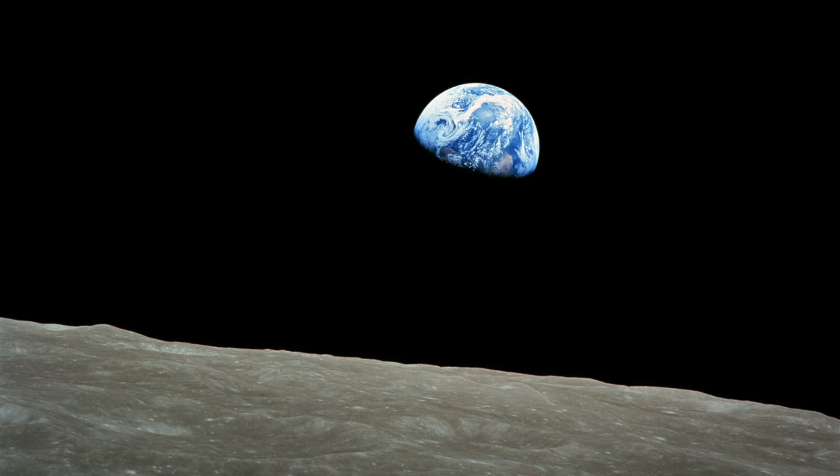You know, architects, we're not engineers, we're not scientists. We have a specific skill set, which is almost like that of integrators. We bring together a lot of different languages, a lot of different mindsets, and we try to bring a vision to something. This image that you see here is a photo taken by William Anders on the Apollo 8 mission. That was the first crewed mission that circumnavigated the moon.

And what was really poetic about this image, I remember being a kid and seeing this image and thinking, like, who took that photo? How did we even get this picture? It's such a beautiful photo because it reminds us where we are, our place in the solar system, our place in the universe.

And if you dig deeper into what space exploration has given us, it's really a gift of, I would say, depth and understanding and just the vastness of what's out there. And so that really puts things in context. And so as Apollo evolved, there was a lot of, I would say, optimism for what space exploration could become.

And you had scientists at Princeton coming up with all these visions, working with artists, working with architects, engineers. Everybody wanted to be a part of this movement. And these are images that depict this idea of an O'Neill cylinder. Gerard O'Neill was a very famous scientist and engineer, and he started putting these kinds of ideas together, pretty much transplanting Earth-based architecture into space and just making it visually provocative.

But what was really cool about this movement, I'm sure at that time, was that everybody wanted to be a part of it. And just like today, there's actually a pretty significant shift. If you follow some of the news that's happening with space transportation, most recently with SpaceX, this is really starting to ignite, I think, our imagination on what may be possible in the future. But going back to this, this is an image that really inspired a lot of creativity at that time.

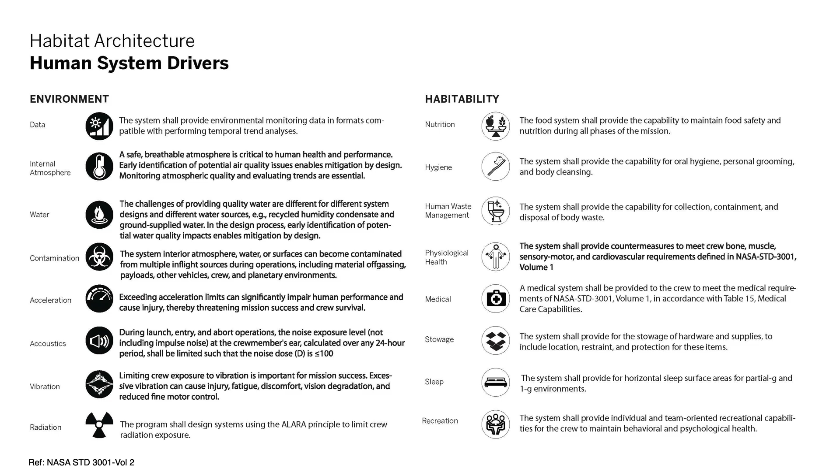In terms of habitability, the architect comes in and says, okay, well, what are the systems that we have to integrate into this habitable space? Obviously, you need exercise. You need to maintain your physiology while you're up there. You need medical equipment. You need to be able to provide stowage, a lot of stowage for consumables and also for crew use. And so there's a lot of layers of information that are pretty similar almost to an architect's manual, I would say.

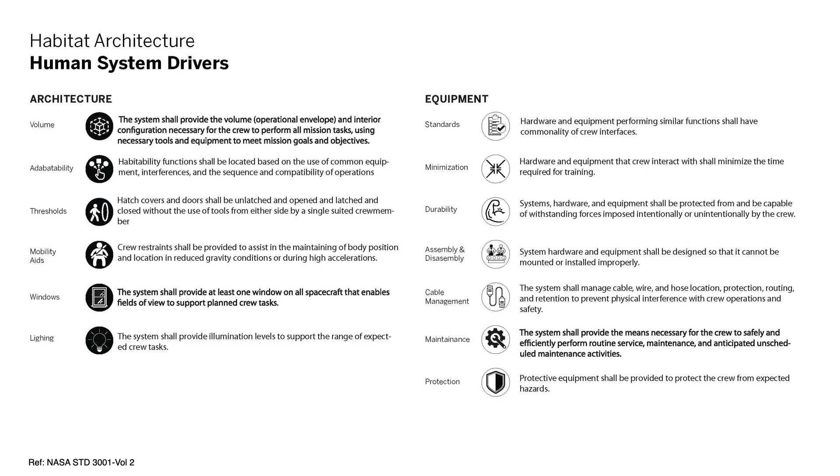And here, the list goes on and on. I guess that's the point of this, but as I started to dig deeper into the human system drivers, I started to understand better the different relationships between each one of these systems and how they relate to other more abstract notions of things like, what is well-being or what is the human experience and what makes for a more productive space. So those kinds of relationships really helped define some of the work that we were doing throughout this project.

Additionally, there's a lot of crew interfaces, something that we take for granted, because crew interfaces are not just there to control the vehicle, but they're there for you to be able to monitor and manage basically a machine that's keeping you alive in space. And so if you as an architect can come in and say, I'd like to design this interface, or position it in such a way where you can do multiple tasks concurrently or make space multi-purpose, you actually have a role to play in that.

It's like you're not just given a product and told, here's a dashboard, put it there. You can start to define some of those parameters and you can even start to design the interface itself. And so that's the way that we thought about it. We thought about it holistically, everything from designing the structure, the space habitat structure, to thinking about the internal systems and how they work together.

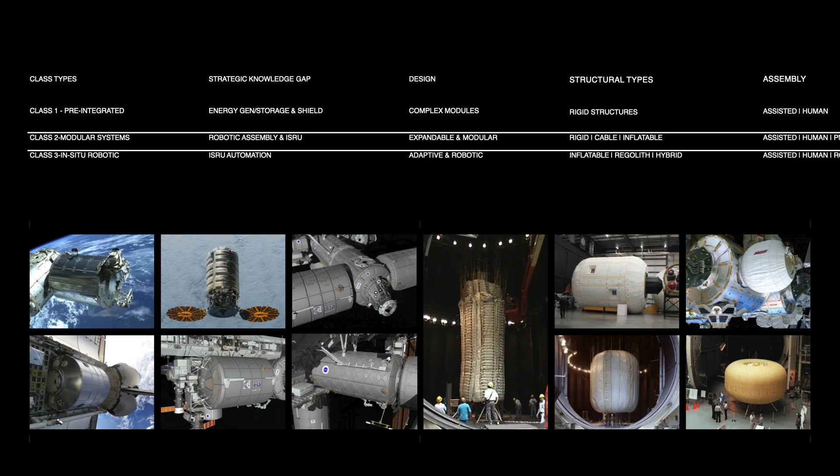In space architecture, there's kind of three classes, if you will. There's the pre-integrated class, which is what you see on the International Space Station. The International Space Station, I won't go into too much detail, but it's really just a big endeavor, a lot of different nations contributing different components to be able to build this large piece of infrastructure in space, everything from power to crew mobility to habitation spaces. The list goes on and on.

And what makes that amazing is that when you have international partners working together to build something of this scale, you kind of get the best of everyone, because certain nations are really good at certain things. The Europeans are really good at life support systems, whereas transportation systems might be something that the US has actually advanced significantly.

And then there's also modular systems like inflatable technologies, which were tested quite rigorously during the TransHab project, which was a NASA-led project. And that project really tried to take this idea of fabrics. So what is an inflatable? In technical terms, they call it soft goods technology.

And really what it is, it's a multi-layer system that starts with almost woven, if you imagine belts and woven threads. And then the weaving is kind of the core technology. A lot of patents have been created around this. And also materials have been invented to make this even better. And there's currently a lot of testing happening in the commercial sector as well.

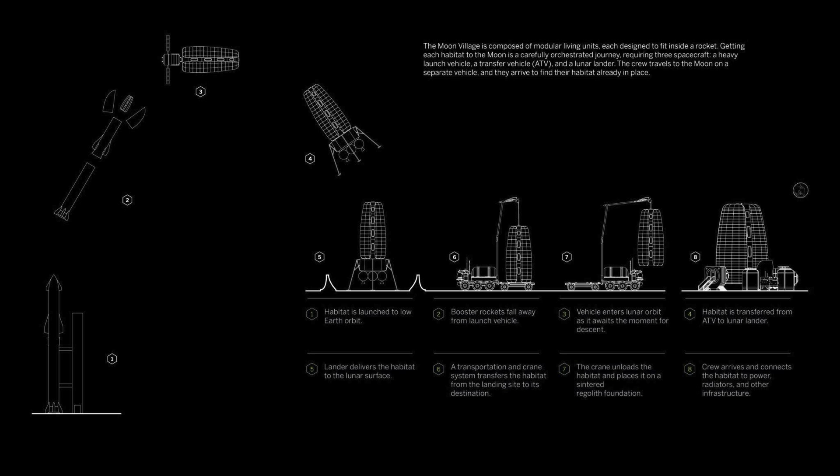And so these are additional pieces of infrastructure that are needed to be able to take a habitat from Earth all the way to another celestial body or the moon, and then land it safely. Once you're in lunar orbit, you're orbiting the moon, and you're attached to this tug that took you there, had just enough fuel to get you there. Then you need to rendezvous with a lander, and that lander weighs just as much, if not more, than the habitat, because it has a lot of fuel and it's waiting for you there. So then once you attach and rendezvous with that lander, then you take it down.

And once you're on the surface, if you can even get it that far, then all of a sudden you have to offload it from the lander onto a vehicle that is designed and engineered to be able to lift a habitat of this scale. And then you have to take it down to the final destination. So that's kind of what you're seeing here in these slides. It's the sequence of steps that it takes to get a habitat from Earth all the way to its final destination. But there is a lot of complexity involved. And here we're just trying to illustrate it as simply as possible.

And now as you get deeper into the habitable structure itself, some of the problems we were trying to solve is, what is the mission duration? In this case, it was kind of self-imposed. We've seen on the ISS that people have stayed for up to a year or more, and you have a certain amount of volume for every given person.

And in this case, we said, what if we pushed ourselves to maximize the payload capacity of a Starship or a heavy lift vehicle, and then create a space that could last for up to 500 days. And that's pretty much pushing the boundaries of what's even possible today. But just for the project itself, we said, okay, let's make that happen.

Pressurized volume, we ended up with 700 cubic meters. Net habitable volume, after you eliminate all of the structures, all of the ECLSS, all of the equipment, basically all the systems that take up space, we're left with a net habitable volume, and that's what gets divided per crew member for that given duration. And so it starts to get really small really fast, because the longer your mission duration, the more material you need to bring with you, the more water, the more systems. And so that starts to eat away at the usable volume.

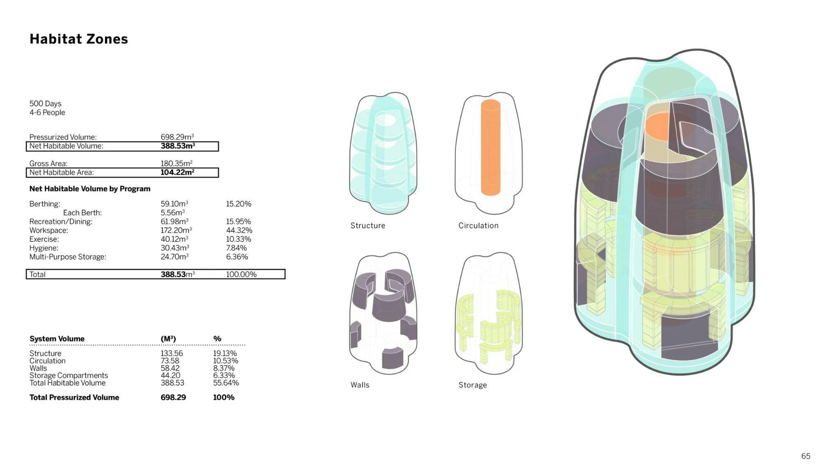But you need space. You need space for humans to be able to thrive, for people to do exercise, to have daily activities. And there's a lot of activities that take place. They're doing scientific work. They're doing research. They may even be doing some actual industrial work or research that needs to happen for us to make this sustainable. Here's a cross-section looking at this design.

One key element was the airlock. It's a smaller component, but it's an incredibly important component, because without the airlock, you can't get inside. The airlock allows you to segregate the inside habitat atmosphere from the exterior. So it's basically like a vestibule. You go into the airlock, that airlock is sealed, and then once you close the door, you take off your suit, and maybe you're covered in dust, but that dust has been known to cause a lot of harmful effects on the human body, and it even damages equipment.

And so you need to be able to doff your suit, and then store your suit so that you can replenish the ECLSS on the suit, because the suit itself is like a life support. It's basically like a mini habitat that wraps your body. And when you go out into the lunar environment, that thing is keeping you alive. So you need to be able to replenish it and repair it. It's the only way for you to escape if something goes wrong.

And so the airlock attaches to the habitat. You walk into the habitat, and you're in the workstation. So this is kind of like the workshop. This is where you can get a little bit dirty. You have some of the control systems for doing EVAs, or what they call extravehicular activities.

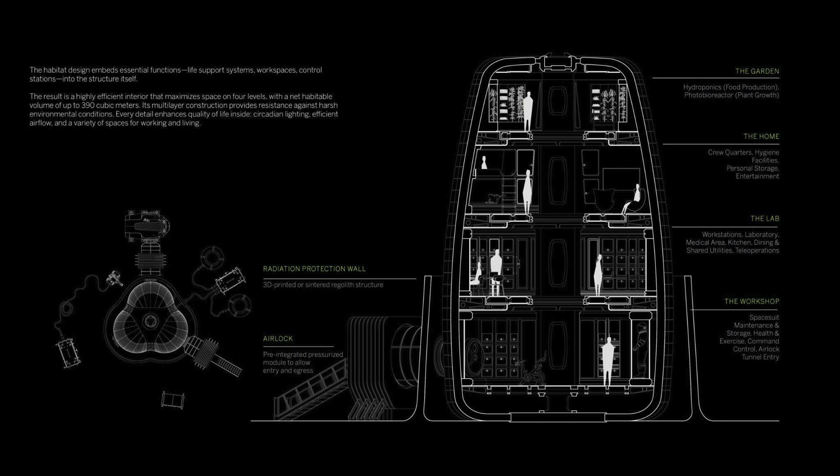And then we designed this vertically, and so the only way to move vertically is to have a lift or to have stairs. And so we decided to do a combination of the two, because in some cases you may want to take things that you can't carry up, and in some cases you may just want to be able to move your own body up, and especially on 1/6 G, it's much easier than on Earth gravity.

Here are the floor plans, and you can see here that once the habitat is deployed, we ended up with 3 lobes, and there's these tunnels which connect to the airlocks or potentially to vehicles, and then you have all of the racks arrayed around the perimeter. One thing to keep in mind is that envelope, the exterior thickness, is realistically pretty thick. We're talking about maybe 200 millimeters or more, just to be able to accommodate all of the multiple layers that are involved in making that possible.

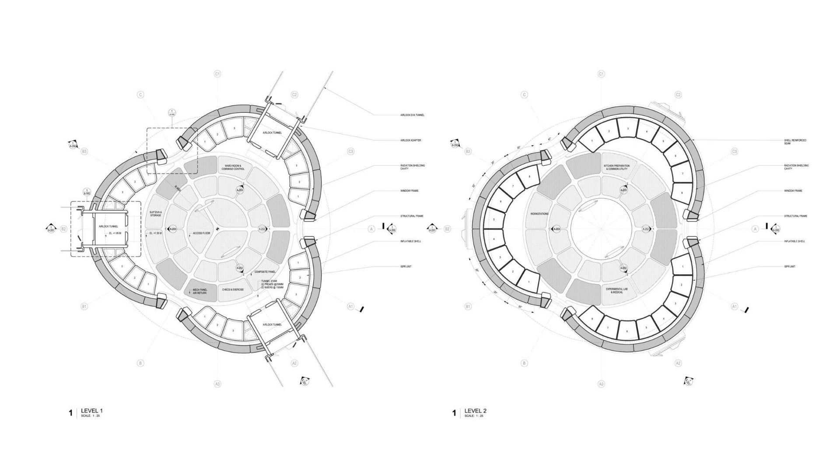And then on the right, you see the second floor. And then the third floor, this is where we had the crew quarters. And then on the fourth floor, we decided to put some kind of food production system that would advance the ECLSS, or the life support system. Because food production in this case, it's more than just producing food, it's also using things like biological systems to be able to scrub the CO2. So there's a lot of interesting technologies in that field. We can talk about that later.

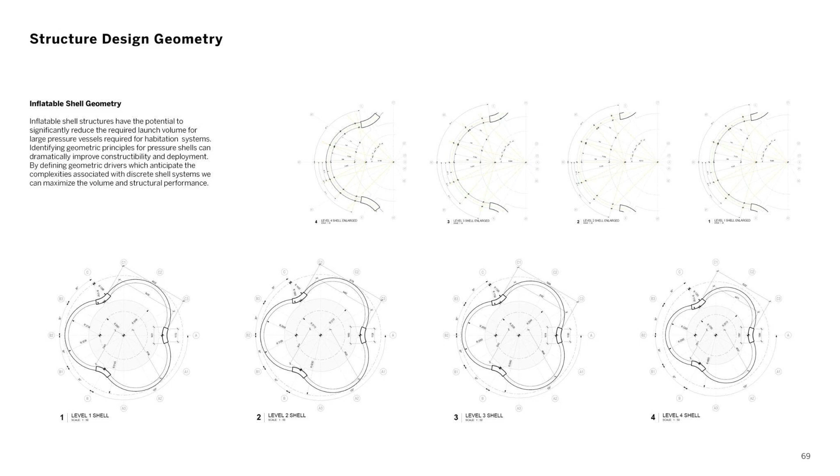And then here are some drawings just to show the way that the geometry would work. And this is something that we wanted to think about carefully, because as architects, we also want to make this constructible. And so we started figuring out how much of the geometry can we inform based on our knowledge of the construction limitations of fabric. And then here are some details of what that section looks like at the window.

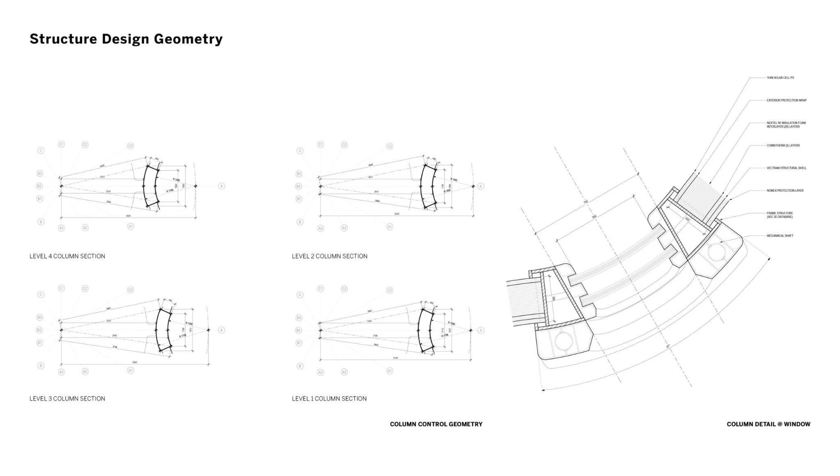So if you look at the top part of that section, that's actually the exterior. And then if you look at the bottom part of that section, that's the interior. And then there you see the mechanical chase, which follows the structure. And you can see kind of like the multi-layer system coming into that column. And then the window with 2 panes.

The windows are really thick. You have to make them thick. Plus you need shutters on the outside in case there's some kind of micrometeoroid. So it takes a lot of protection.

Here you see some diagrams of how we imagine that column and the fabric to come together. And you see there's different kinds of weaves you can take advantage of depending on the loads. So if you have cross-sectional loads, you can look at something like an ideal weave. That's what it's called, but it's more like a consistently spread out weave. And then when you have longitudinal areas, you can put something like an equatorial weave, which basically puts more material in one direction than the other.

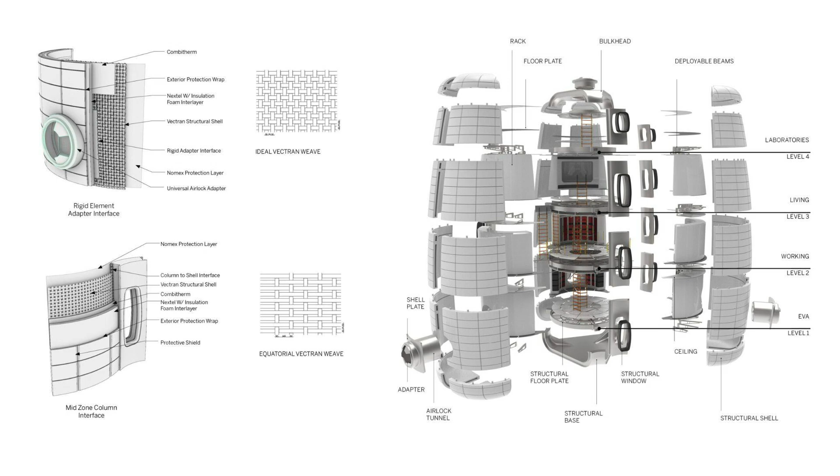Here are some structural analysis diagrams. What we did here was we were trying to simulate how the habitat would deploy, and we used actually building structural software to do this. And with the team, we were trying to figure out what is the most optimal geometry given the pinpoints and given the interfaces. And we were getting pretty close to the form, but obviously, this is a very complex system to solve, so you would have to really solve the problem by building it. That's one of the key challenges here.

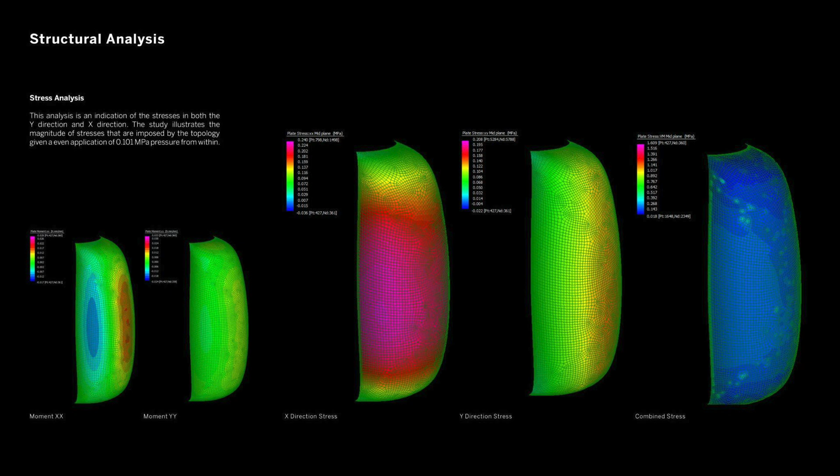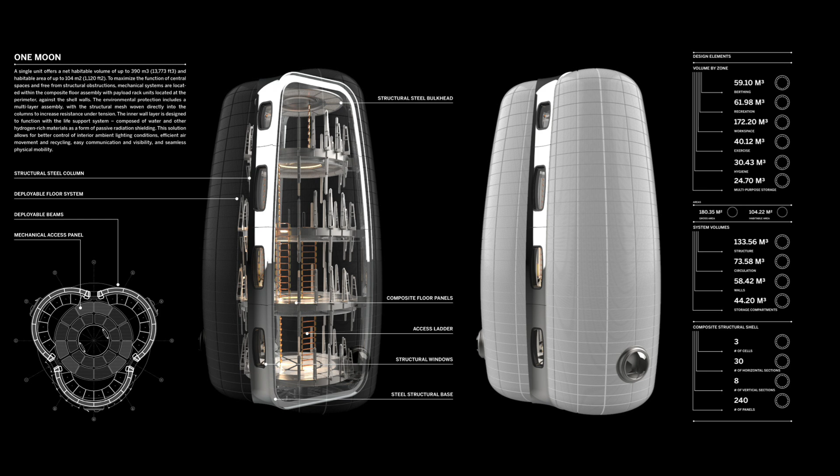And obviously, all this has to be tied down, fixed, and it has to be prepared for launch. There's a lot of complicated things that we didn't get to solve, but it's still a lot of work that we put together for this project.

And so the thesis of this, as I started from the beginning, was we wanted to figure out how do you start with an element like a habitat and then expand to make this more of a master plan. And so the idea was, if we design a modular system and then we take that same approach to a lot of the different elements, we can start to reconfigure a master plan that would evolve over time, over many years, with multiple partners contributing throughout the world, and the ability to even test some advanced 3D printing technologies in the future.

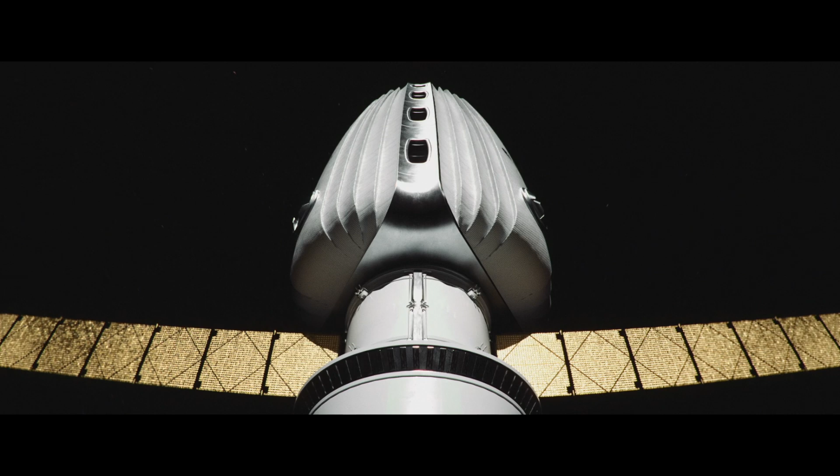More than 50 years have passed since humans last traveled to the moon, and there's still much we don't know about the brightest object in our night sky. What would it mean to return to the moon today? To leave more than flags and footsteps? To create a sustainable home? It would open new avenues for science. It could kickstart an outer space economy. And it would allow us to create a new kind of community, to discover how we might live together beyond the Earth.

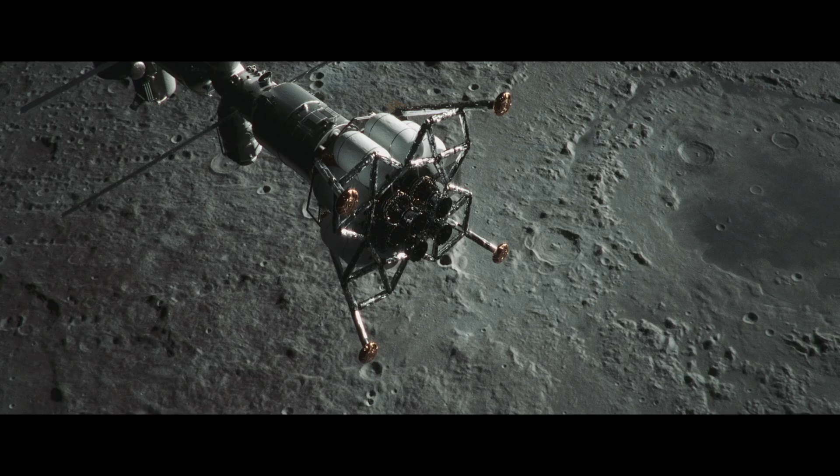The European Space Agency's concept for a moon village is an international endeavor, bringing together governments, industry, and perhaps private entrepreneurs to support a permanent human presence on the moon. If an earlier era of space exploration was driven by competition, this one will be defined by collaboration.

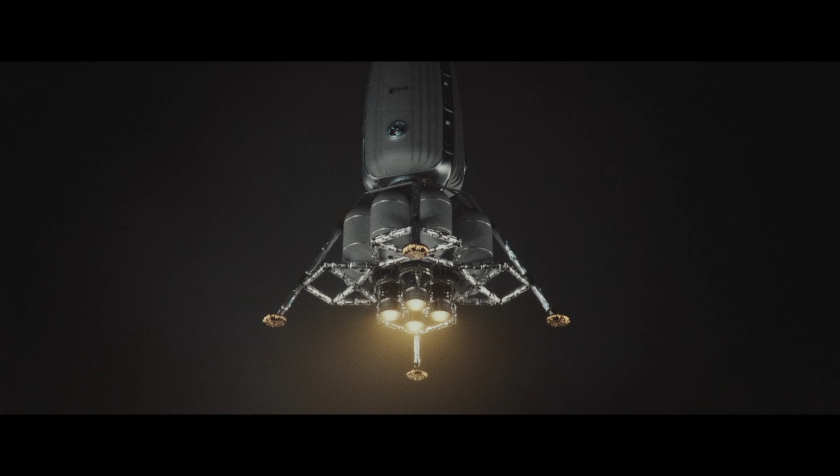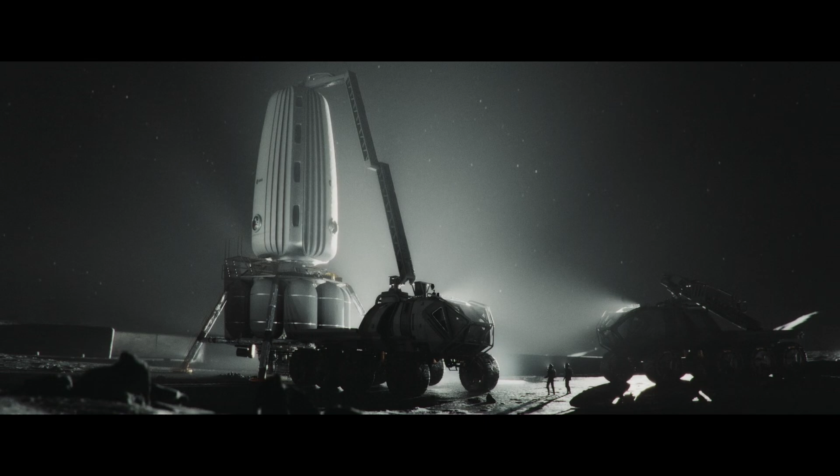What would it take to truly thrive in space? How can we make the moon feel like home? Built from a rigid composite frame and an inflatable structural shell, the habitat maximizes usable space and creates a sense of openness on 4 levels.

The first phase of development will allow crews to live, work, and continue building the settlement. Gradually, additional infrastructure and equipment will arrive, and new habitation units can serve functions such as food production and science operations. Eventually, the Moon Village will grow into a thriving community, a hub for science, exploration, and even tourism.

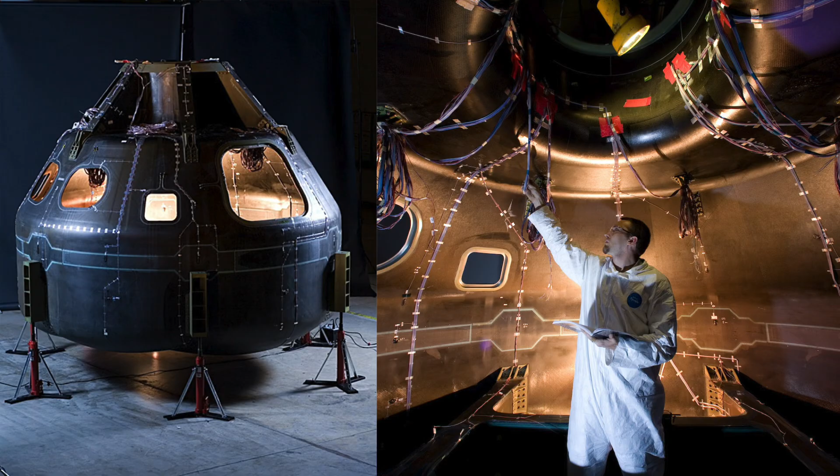And some of the research we were doing at this time was going back to the Orion capsule when they were trying to figure out, can we build this out of carbon fiber? And there was some work done. What you see here is a project that NASA supported looking into carbon fiber. And it's kind of cool.

When you start to peel it away, what's inside is a honeycomb structure. So it's a metal. And then you have these thin layers of carbon fiber that are just hand laid. It's a very manual process. And then you have these splicing elements, which you see right there at the bottom. There's this delineated splicing element, and that brings together two pieces, the top half and the bottom half.

And you basically have a cone and a barrel section. And then the bottom of it had these really cool lobes. And you can kind of see the guy standing in there.

There's these structural beams spanning. And the whole thing is carbon fiber and titanium, or there's other metals in there too. But it's just awesome to see that you can build this, make a lighter structure, and still work with the number of penetrations that you want to.

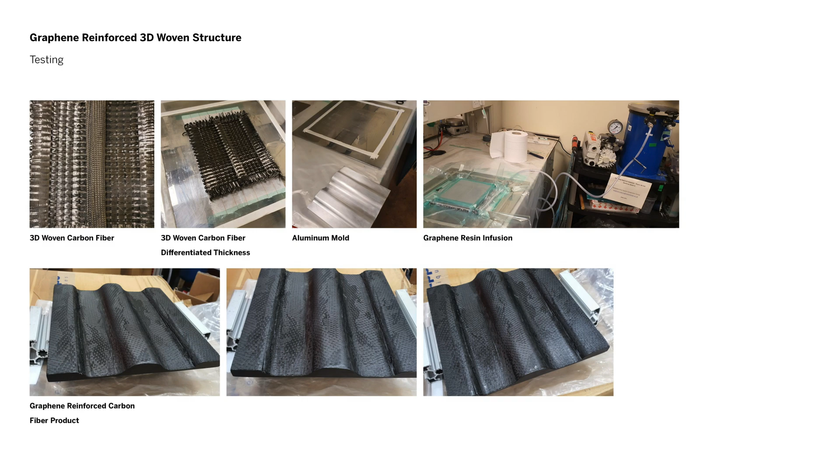So we took that. Here's some images of us just testing the material. You can see that there's a 3D woven fabric. There's a rib in the middle. And then we put that into a resin mix and we pressed it. And then the product on the bottom, you can see it's the size of a book. It's not too big. But then we took that sample and we started just testing it, doing some analysis, testing to see how it would behave. And that was just a process, no funding, just trying to figure out what can we do with this.

But from the architectural side, we really explored this design to the fullest extent. We took that idea here, you see that same section. So even though the focus was on the material technology, we wanted to explore architecturally what would that look like on the inside. And of course, you have to start from the hardest part, which is building the structure. And so you can see on the outside, you have the multi-layer insulation, and then you have the Whipple shield. The Whipple shield is what takes on the impact, and then it's broken up into different segments so you can actually bolt it on to the main structure.

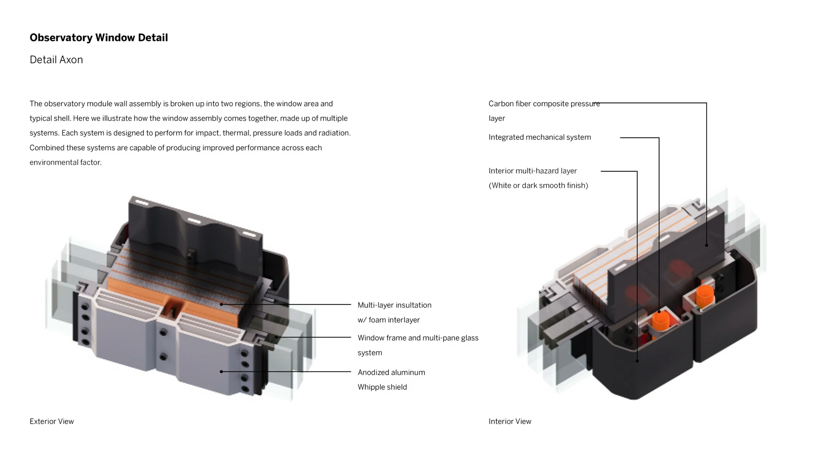And then you have the window frames, and the window frames are also multi-layer. You have an outer pane for protection in case you have an impact, and then you have obviously the two inner panes. And on the inside, we also have a shell that covers the carbon fiber so that you can put chases directly inside. And those chases allow you to basically move electrical and fluids within the habitat because you need to be able to move these systems throughout.

This is what it looks and feels like on the inside. So we really wanted to just explore this idea of an observatory in space. What would it mean to design and build a structure like this and put it up in low Earth orbit and have it as a destination for people to go up there, look out, look back. It's both scientific, but it can also be a touristic destination. So, that's some of the space architecture work.

There was a lot of projects happening in the space world. Like Jesse said, I was working on space work, and then I was also working on high rises. And what I'm going to show you is some of my most recent work. I've been exploring ideas for high-rise buildings based on a lot of the work that I did when I was working on real high-rise buildings that are either built or in the process of being built. And one of the things that came up again and again was this idea of sustainability and structural integration, and how do we maximally make use of a building's surface area?

Because if you think about it, the envelope of a building, if you walk in this building, you look outside and you see that there's a big envelope, there's a lot of opportunity for a building's envelope to do something productive. Architecture can be more productive. And so in a lot of my work, I try to explore how can architecture become more productive and produce something of value that can be used to operate the building.

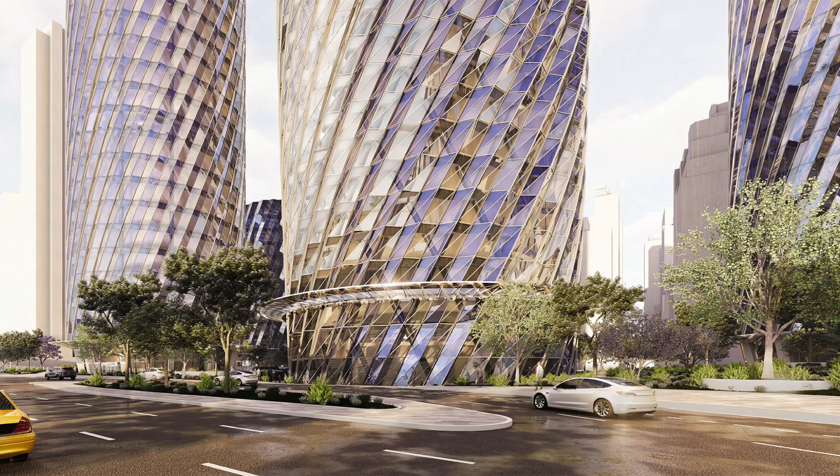This is the East Rivers Tower project. When we started working on this with my team, we took a site, the biggest undeveloped site in New York, and we said, what if we build a number of high rises with one landmark tower that would incorporate solar panels on the outside, what you call BIPV, or building integrated photovoltaics. You can see here, it's on the East River, adjacent to the United Nations building. That's the UN building on the right. I think it was designed by Le Corbusier and Oscar Niemeyer, among other architects.

And then you see the Chrysler Tower, which is just iconic. It's one of the most beautiful buildings in New York, and will be that for a long time. And then you can see on the bottom all of the key ideas behind this design. It's sustainability, there's ecology happening on the inside, systems integration, high performance exterior, biophilic design, and of course, we're building this for humans, and so it has to be human-centric.

There have to be ways of interacting with the building and the spaces that allow humans to feel like they're living in their natural environment. Here are some key diagrams just to show the articulation of the form.

When you design a tower, you typically start with a form, and especially when you start to get to the higher, taller buildings, the form makes a big difference because of wind. Wind exerts a lot of pressure on the building, and you want to, as they say, confuse the wind cross-sectionally as you're going up, so you can mitigate the wind forces and not allow for natural frequency to take place.

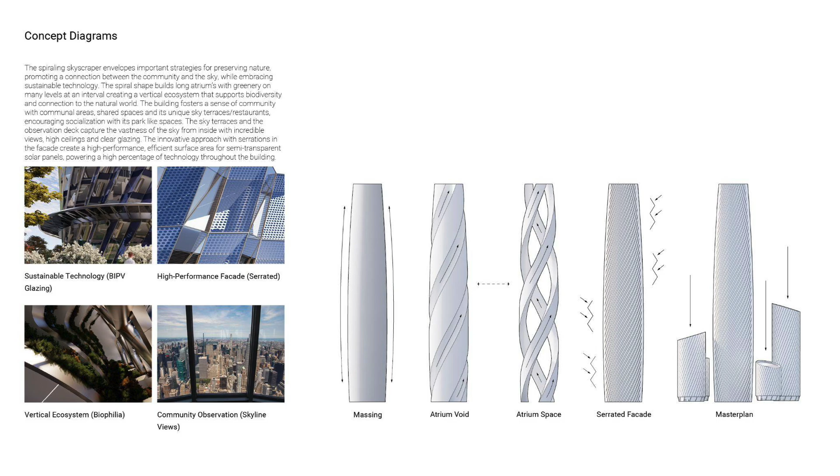And then the last key move that we made was we serrated the glass. There's a lot of precedent for doing the serrated geometry. There are even some buildings that have done that with BIPV, but usually in a vertical section. I had also worked on a building overseas in Asia, which is being built, where we actually did something similar, but in the cross section. This building is unique because it's on the East River. You have exposure to sunlight, and you can actually take advantage of that sunlight and use it for something productive.

This is just to showcase the process. When I design buildings, I use a lot of computational design. I use Grasshopper, and it's really just a tool. It's like the paintbrush for an architect. If you can use Grasshopper, you can flex a lot of different ideas, and you can very quickly visualize and quantify the impact that a design decision is making on your project, especially at this scale, because there's a lot of repetition, so you can do parametric and computational design pretty effectively.

And I usually like to break up the systems. Design geometry is a very important part of design. The geometry then has to translate into structural systems, and so you need to be able to extract things like wireframes and points and vertices or vectors, because you can then hand that information over to an engineer. I don't know how many of you have worked with engineers, but they're not just going to take your Rhino model and do analysis on it. They want very specific information. Wireframes are usually the best.

And then for the purpose of designing the facade system, you need to be able to subdivide and separate different facade systems. Sometimes you have spandrels, sometimes you have glass, sometimes you have fins. All these systems need to be separated and treated differently because you're going to detail them differently.

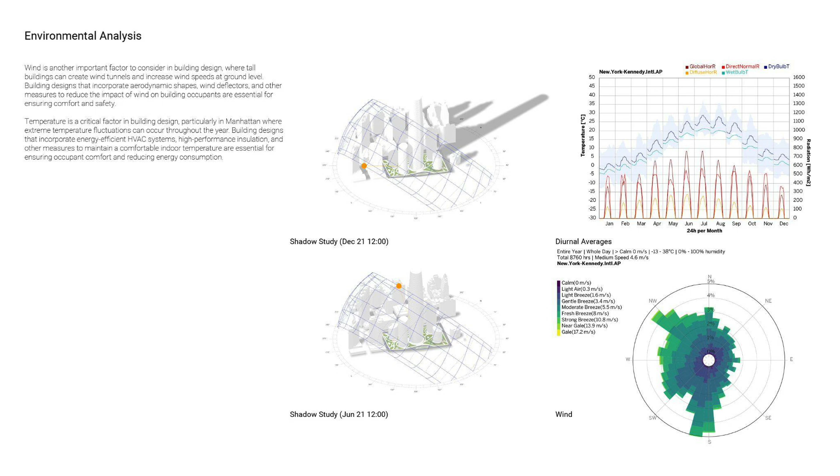Environmental analysis is also a key part of this. I used to use Grasshopper all the time, but nowadays there are amazing tools out there, so there's no excuse for any architect not to be using these tools. In this case, Climate Studio: you can basically take your design, put it into Climate Studio, and just do a quick solar analysis to look at the impact of shading on your building.

But to push it a little bit further, you can do analysis on irradiation and then quantify how much energy potential your building is receiving throughout the year. And with that energy potential, if you go and pick a product like a BIPV, you can put it on your building and say, hey, I could power, in this case, 600 homes a year. That's the equivalent of 6 million kilowatt hours. That's a pretty awesome contribution if you do it properly.

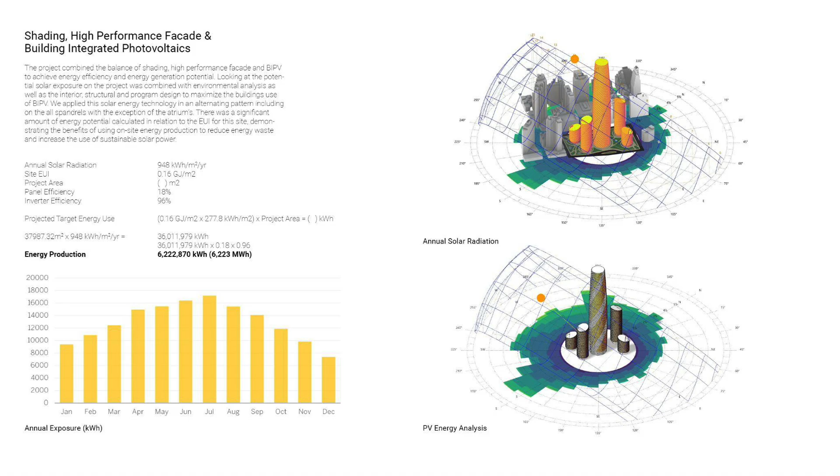And if you detail the facade properly, you can actually update it over the years. So if the building's going to be there for 100 years, every 20 years you could say, hey, I have the latest and greatest technology for solar panel efficiency, from 18% to 40%.

And yeah, that's the idea. There's actually solar panels in the space industry, which are a little bit more expensive, but much higher efficiency. And so imagine a future where we can take some of that technology and bring it to the building sector and really just power our buildings more passively. So that would be pretty cool.

And then here's us trying to figure out, okay, well, what's the ratio of glazing to spandrel to BIPV? And so we wanted to really try to balance these two. And you can see that there's about 46% glazing and 54% solar BIPV, and that's happening often in the in-between areas where you have not visible glass, but where you have the floor stack, and that's a very important surface area that you can make use of. And then in the spiral areas, you can see that there's these gardens kind of weaving through the tower.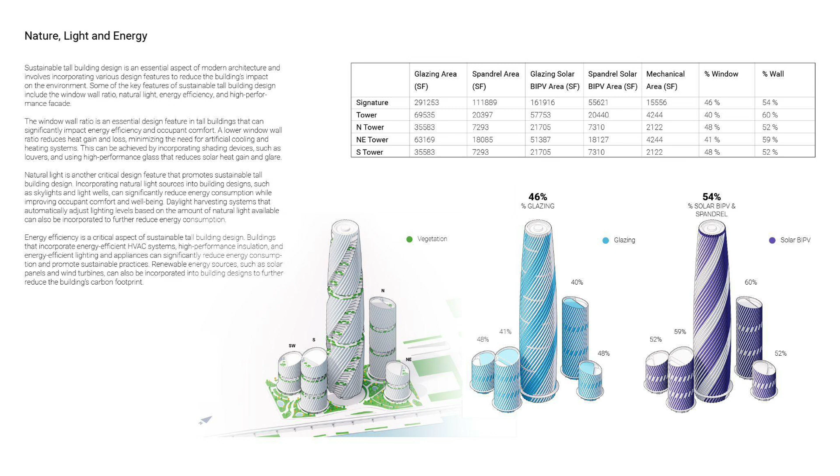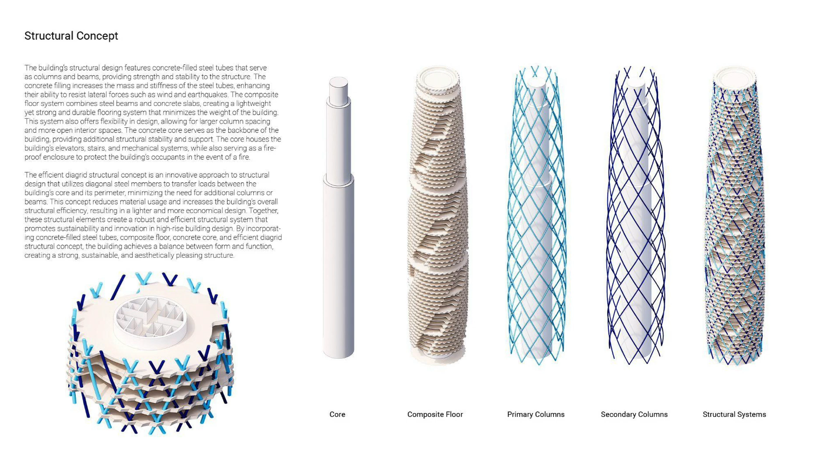And here's a diagram of a structure. It's basically a diagrid, and it's a diagrid with varying column sizes, and then the columns would just wrap the entire structure and span back to the core, and then that core would serve as kind of the spine of the building. And you see all the floor plates here. And here are some details looking at how the spandrel would work. It's all planar, it's all panelized, all planar.

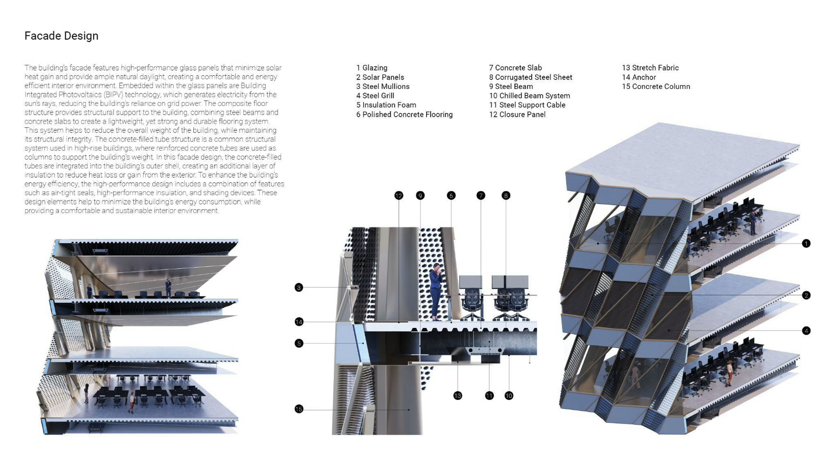And we did some analysis on how this would perform, and the numbers kept coming back consistently. So it was really interesting to see that solar BIPV could actually have a big impact on that. But not only that, you can also use solar BIPV that is fritted, that isn't completely opaque, but actually allows the transmission of light. And so having natural light come in, but also collecting some of that energy, I think is a really powerful idea. And we could be doing that a lot more in our buildings.

And then here's a cross-section just to show how basically the infrastructure works. There's a lot of different buildings. You have housing, you have office, you have workspaces, you have entertainment. It's really like a city within the city. And you see that this is a trend in New York where mega projects are happening like Hudson Yards.

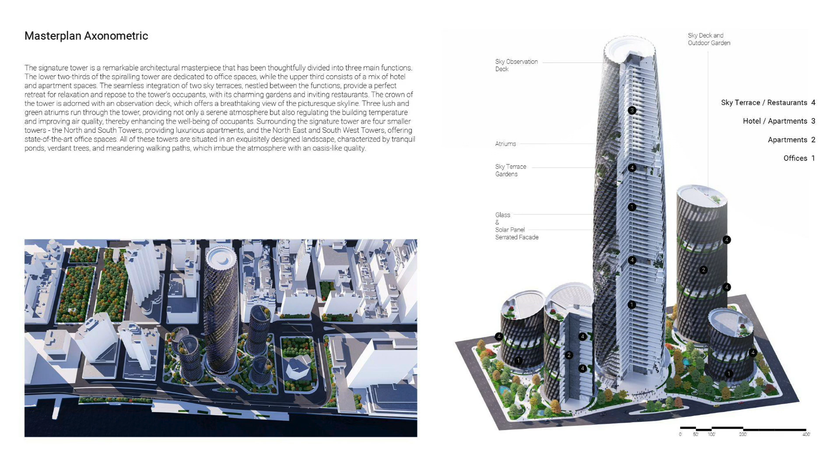And so the idea of creating a livable, viable community that is highly sustainable and hopefully self-sustaining could be really the future that we're looking for when it comes to urbanism. And that was the idea behind this project. And by the way, there is a project actually going up on this site. So I encourage you guys to see what that looks like.

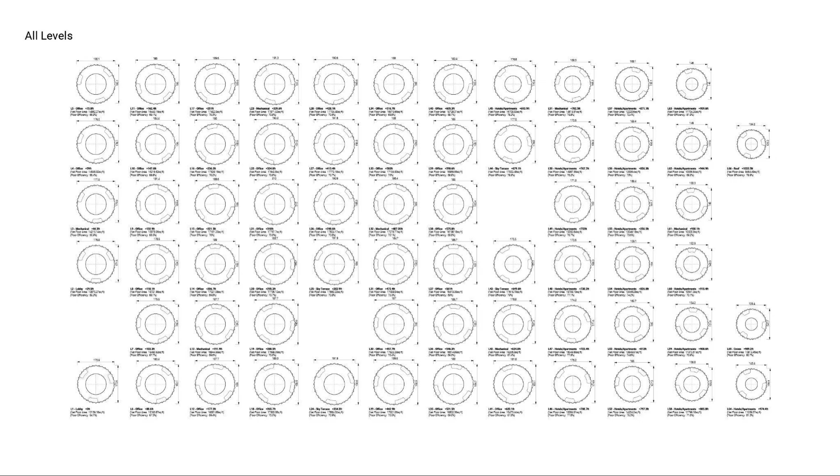And here's a layout of all the floor plans. And again, when you think about computational design, it's a very effective tool because you can very quickly produce and analyze what's happening within your design. And this is what I call the cookie cutter sheet. And I applied this technique to a lot of different projects. It's a really powerful tool when you use it right. You can even use it to lay out your building. In this case, you're seeing just a snapshot of some of the floors.

You have the lobby, which is pretty much the most vital level, because as you come in, that's where you decide, are you going to the hotel, are you going to the office tower? And there's a lot of different programs vertically stacked. And so circulation has to be organized and coordinated very carefully.

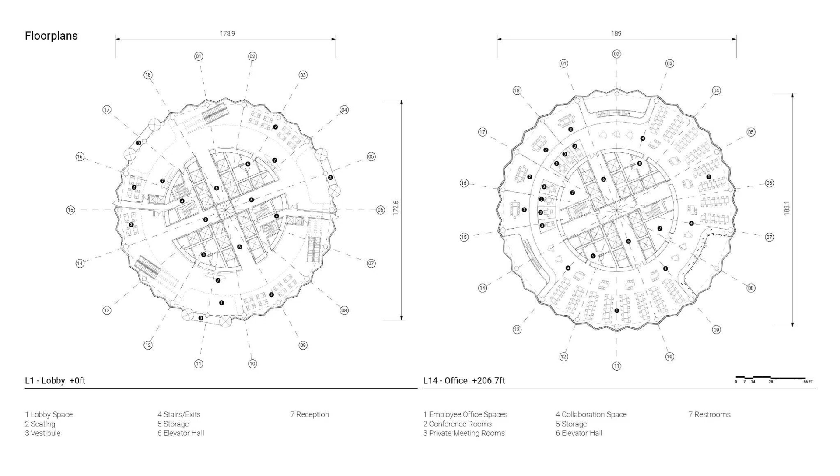And then on the right, you see an office floor. And you can see that there's a lot of open room. There's office spaces, there's conference rooms, there's common spaces, and there's that atrium where you can put a really nice garden and open space, collaborative spaces if you want. And here's another level looking at the Sky Terrace, and that's where you have the park. So it's almost like a miniature park within the tower.

Imagine having a destination within your workspace where you can go and you can take some rest, or meet up with friends, and then maybe even work from that space without having to leave the building. But you can always leave a building.

And then there's a hotel component. And so this works, actually, when you think about the building as it tapers, the bottom sections, which have the largest area, those work really well for office areas. But then when you get to the upper areas, that's where you can start to integrate hotels, because you have a smaller footprint. And hotels typically want to be a little more compact.

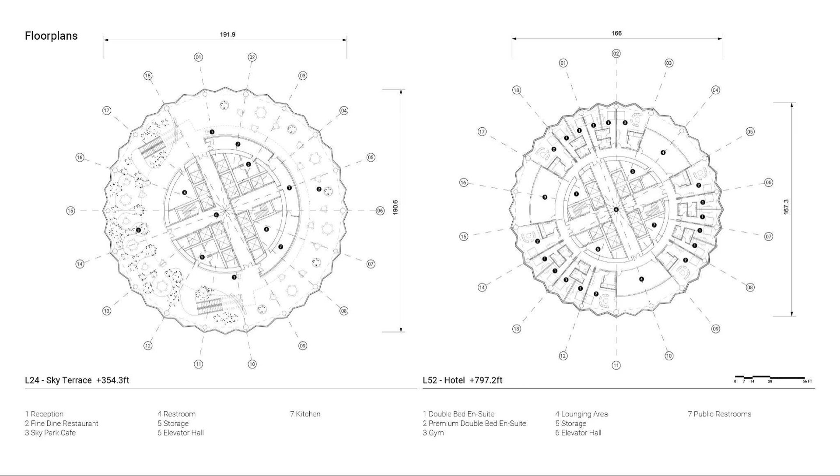And so in terms of, I think, just bringing a new idea to the table, it's how can you integrate all of these different ideas when it comes to sustainability, to energy, to building systems, to the way that you treat urbanism, and then trying to rethink the formula for designing a tower.

This is another project. This was part of a competition that my team worked on. It was a very compact site. It's on Broadway, and currently there's no building there. They demolished the building that was there. And the idea was, what can we do on the site that's this compact, and also in the entertainment district, or they call it the theater district, and start to come up with a new multifaceted, multi-programmed tower that would include restaurants, sky gardens, residential, hotel, and even some co-working spaces.

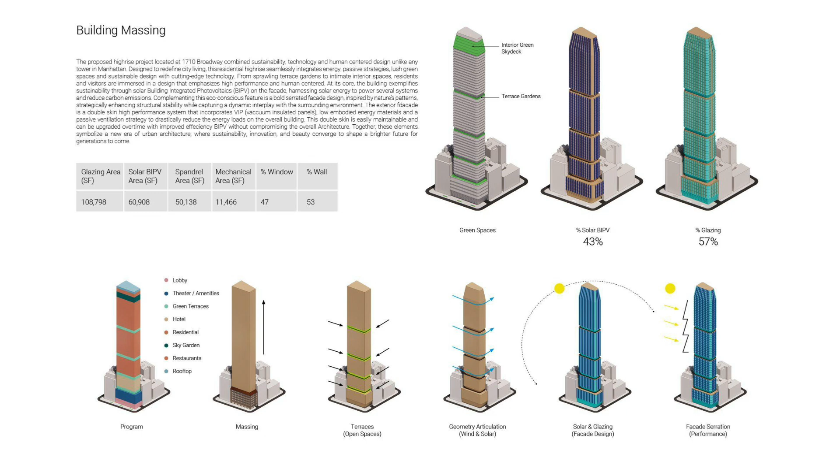And here you see some of the analysis that we were doing. As we were designing the building, we iterated on the form. Again, applying the same processes, similar tools, looking more carefully at carbon, especially carbon, like what is the production of carbon for the design decisions that we were making. And you can see on the right, there's a lot of different strategies.

There's the idea of using electrochromic glass, using, I don't know if you guys have heard of VIP insulation, vacuum insulated panels. And because it's a curtain wall, you can actually carefully install the VIP, which is about 1 inch thick and provides a high level of insulation, and then just sandwich it with a metal panel. And that allows you to insulate the building really well, because it's a vacuum, basically. It's a really, really awesome technology if you can use it carefully.

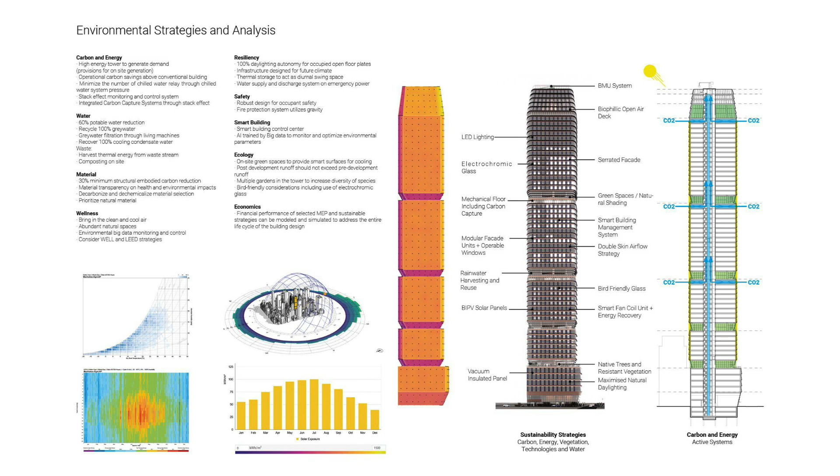And throughout the tower, we were thinking about all these different ideas, including BIPV again, because we wanted to make use of, especially the upper part of the building, for collecting energy. And so one thing that you see here is that this is actually a double skin system. And what we have is two layers. So a double skin system where you have a ventilated cavity between the outer skin and the inner skin.

And then through louvers, you can control the intake of wind. So if you wanted natural air to flow in during the summers, you basically open the louvers, air comes in and starts to condition the building. And if you wanted to heat that in the winter, you can close the louvers and then heat that cavity.

And here you see the different materials that we selected for the project. Looking at copper, it's a really beautiful material. Some towers are starting to use that in New York, and they look awesome. Steel, you can't get away from steel. BIPV, electrochromic glass, VIP insulation, and other natural materials. And you can see the detail on the right.

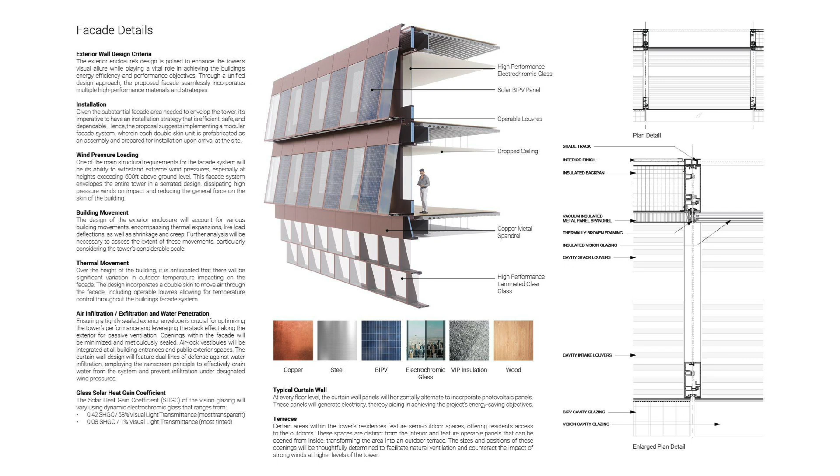And here's a cross section. And here in this image on the right, you can see the louvers. So that's that cavity stack. And that's what allows wind to move through the building. And then the intake on the left.

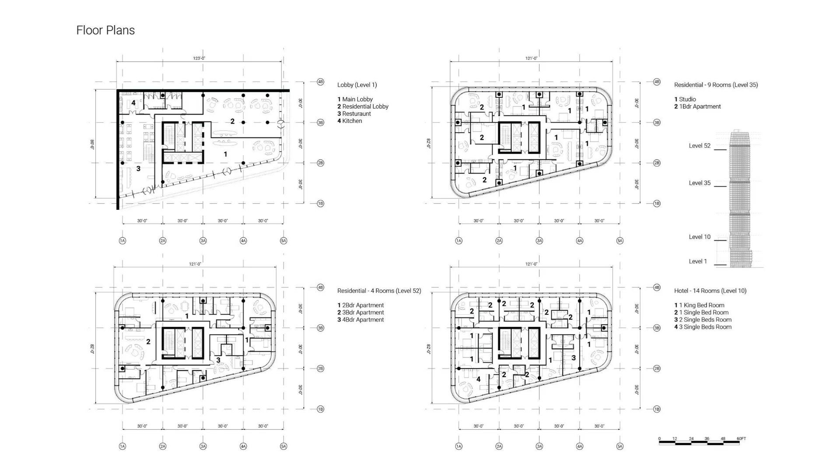In terms of program, again, this was mostly residential. So you can see the apartments here. We were trying to maximally fit multiple units. We worked on including things like single bedroom, 2 bedroom, 3 bedroom. It varied. There's a different demand in this city, and so you have to think carefully about all the different mixes. This is the lobby entrance. It's a very compact entrance, but given the site circumstances, this is what we can do. And this is the podium level, and this is the crown.

So these are just a few more recent projects that I just showed you guys, and this is me trying to crack the puzzle of how can I have an impact on high-rise buildings, and I'm searching for that opportunity where I can find a path to applying some of these ideas to projects.

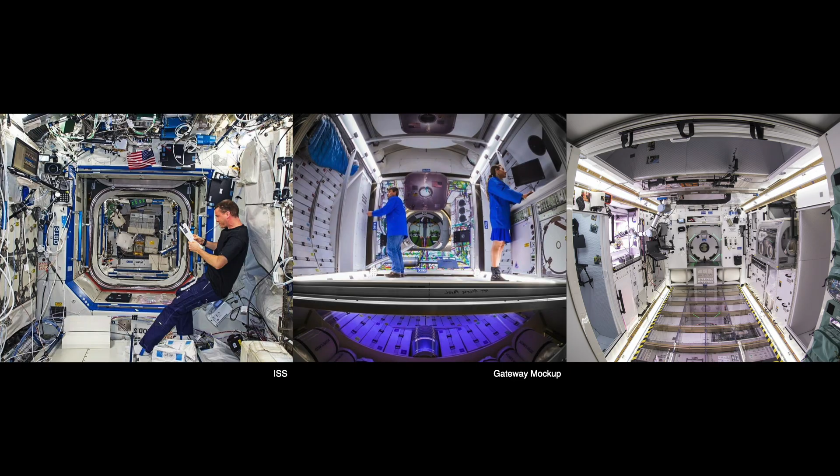And so to that extent, we took a very close look at what's out there. So the ISS is always a precedent, but the ISS is microgravity, so it doesn't directly translate to a lunar surface habitat, but there are some organizational strategies. And one of the things that we try to avoid is having all these surface areas covered and cluttered with systems and gear. And then on the right, you see a mock-up of the Gateway, which is meant to be a destination for lunar orbit in the future. And you can see that there's a difference in thinking. There's a lot of change happening. There are some ideas about how to organize functions better and how to compact the space better.

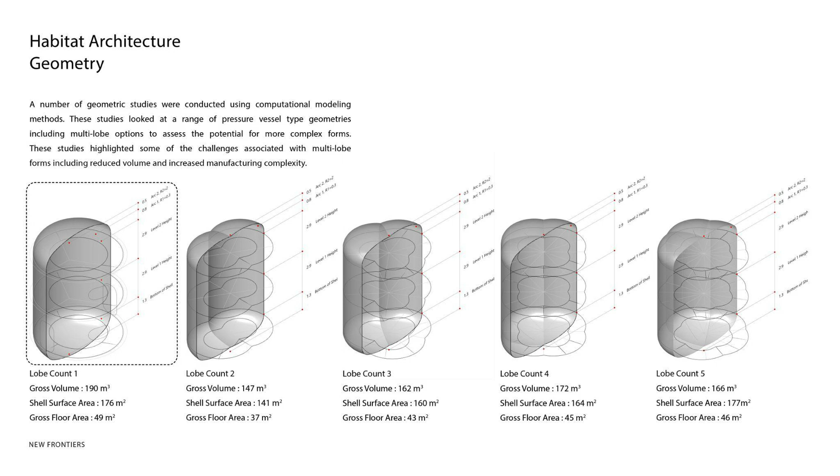And so the approach that we took was, why don't we study the form first, study the envelope of the habitat, and we understand what we want in terms of form factor, and then work our way inward and then back to the form factor. And so here you see a few studies where we're basically generating many options. For this purpose, we use what's called, sorry, not MMOD, MOO, multi-objective optimization.

And so multi-objective optimization is a process that allows you to basically set parameters that you can optimize for, and then you start to generate a lot of different options. And so this allowed us to come up with many options. You see on the right just three. And then those options were characterized in terms of the geometry complexity, in terms of volume, in terms of surface area, and the orientation of some of the penetrations.

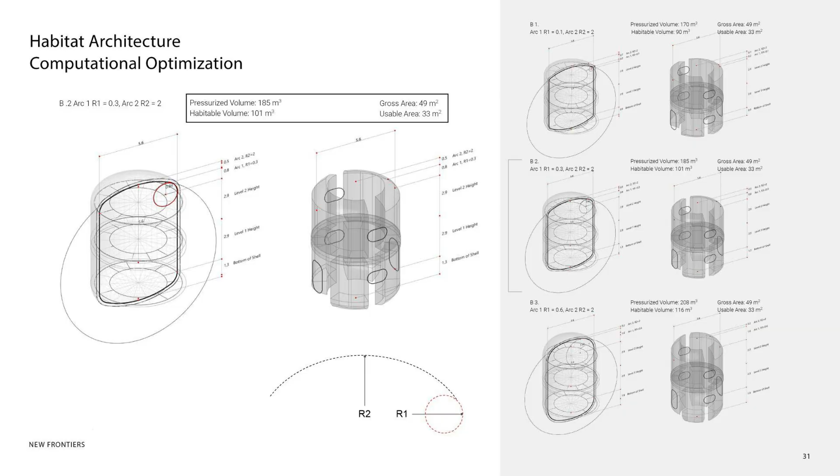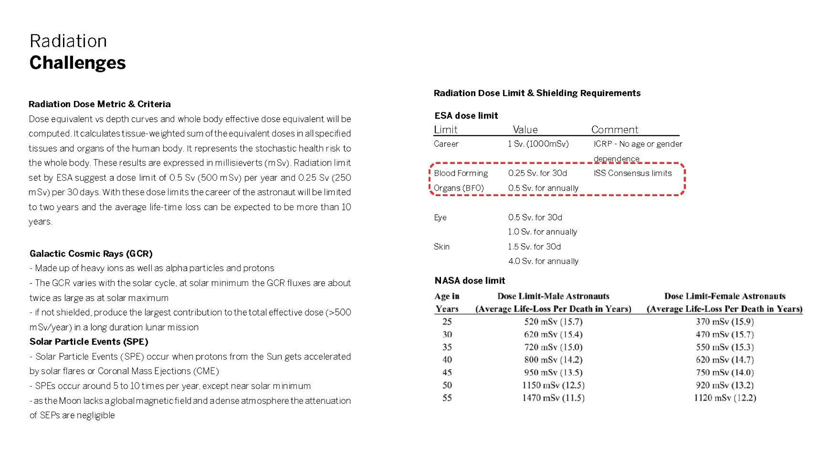But when you're on the moon, these are different. They vary drastically. But you see there are two different dose limits, one ESA and then one NASA. They have different ways of rating this. But we wanted to start thinking carefully about what are the materials that could help us and what are the strategies that we can apply. And so to that extent, we started looking at, again, the envelope.

In this case, we have the MMOD on the outside, we have the thermal layers, the thermal insulation, and then we have the structure. And for the structure, again, we thought, what if we could use carbon fiber? And within the carbon fiber, we would have mechanical chases. And in addition to that, we would also have a water jacket. But you don't see the water here because the water jacket would be locally placed where the crew quarters are, where the astronauts are going to spend many hours resting.

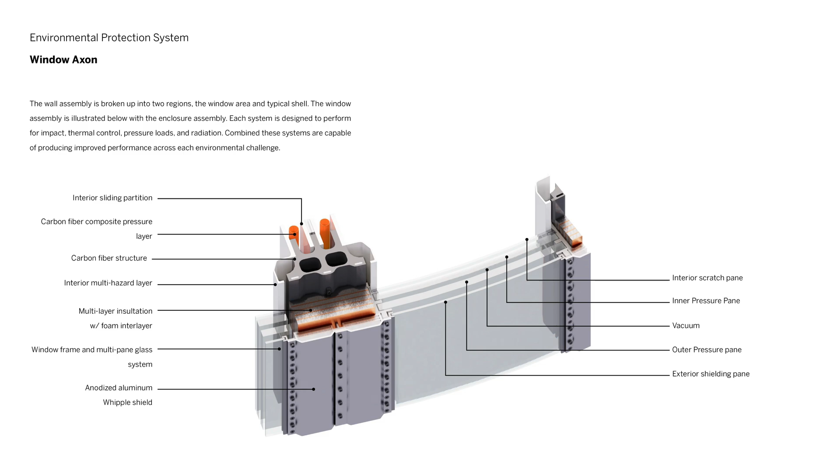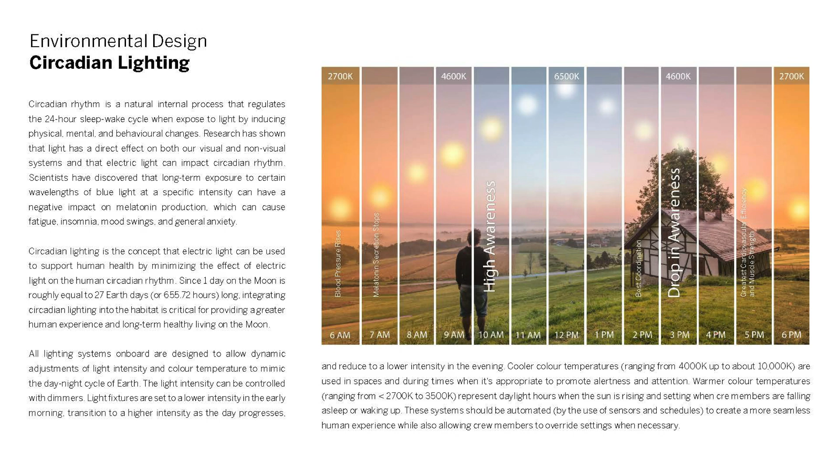So the environmental design played a big role in this. We wanted to try and simulate circadian lighting. Circadian lighting for us, especially in space, meant finding ways to simulate the sunrise and the sunset, but in a confined environment where you're on a different celestial body. And the challenge there was, what are the key technologies? Well, LED lighting is a big one, looking at different surface lighting techniques, whether you have lighting overhead, lighting in your personal spaces, lighting in the floors. And here you see the design that we started to come up with. There's multitask lighting happening throughout.

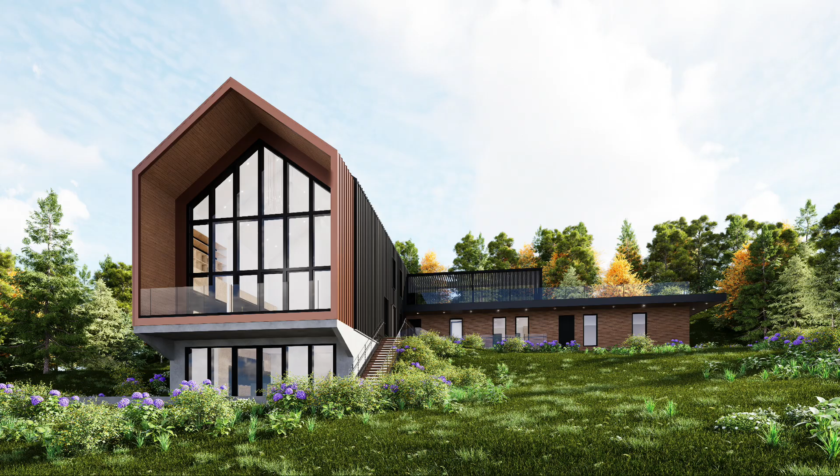All right, so back to Earth. So this is actually a project that I'm building in upstate New York right now. I called it the Atom, and it's a really cool project. So about a year and a half ago, I purchased a piece of land, and I wanted to say, okay, well, how can I test a lot of these ideas of using integrated technologies, smart home systems, modularity, sustainability, and so on and so forth. And so we purchased this piece of land. It's about 1.6 acres. It's overlooking a lake.

And here what you see is, together with a partner of mine, we designed this building, which is 6,000 square feet. We were trying to test a lot of different things, but almost the entire house is modular, with the exception of the basement. It's being built in Pennsylvania, and then the modules come in different elements. There's boxes, there's panels, and then there's some structural elements that are basic, like steel LVL beams and columns.

And what we wanted to do was actually create a passive house. So it's passive house certified, and would produce more energy than it consumes on an annual basis. And to get to that, we had to design the envelope very carefully. What you see is a large window. So a lot of people might think, well, that's not actually very efficient. But because we wanted to minimize the amount of windows that we have on the main body of the building, we put this large window, and we also wanted to orient it towards the view. And because we wanted to make this passive house certified, we had to go with passive house windows. So all the windows you see here are passive house certified.

And so the way it's going to be built, which is really cool because we've been working through this very carefully, is they're going to be taking the units up a hill. They're going to be sitting them on top of the fixed foundation. And the units in the back get installed first. So you're looking at it right now from the entrance of the site. And then you have the wing, which actually has the master bedroom and the garage. And then those units get installed afterwards.

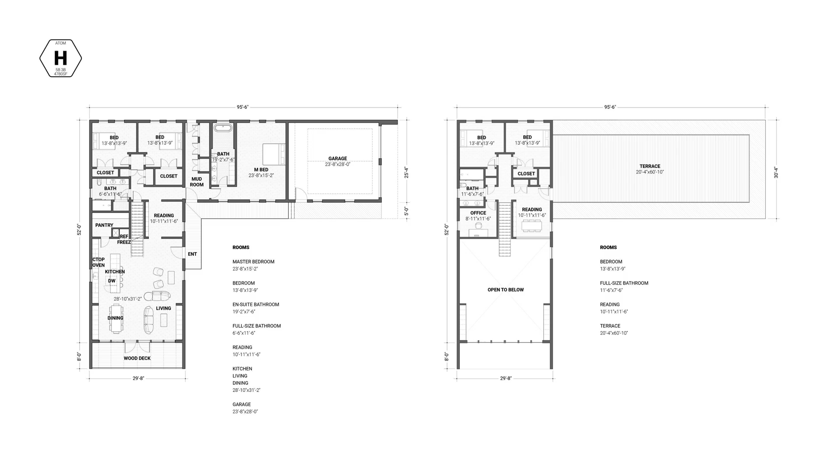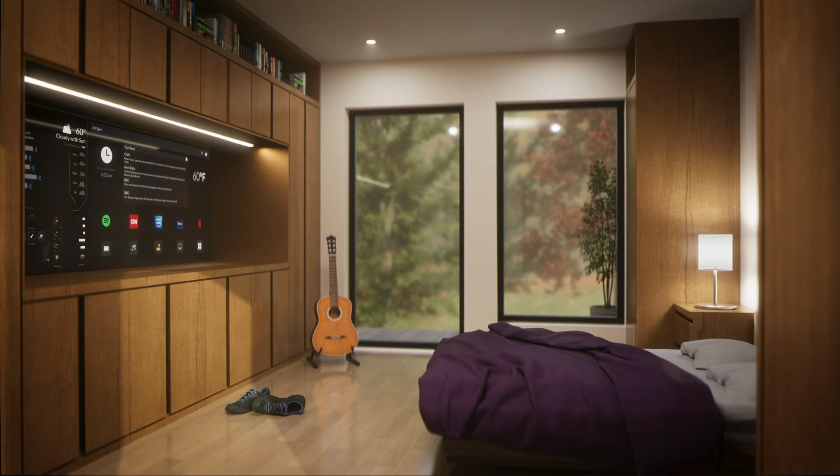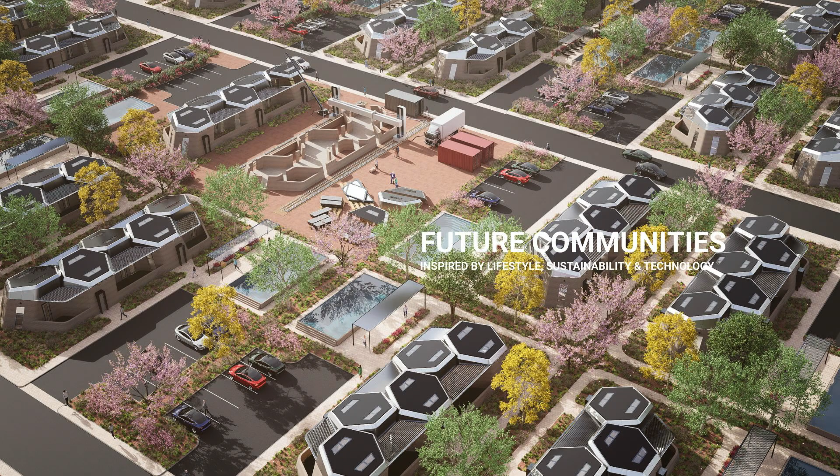Earlier this year, there was a competition. I don't know if you guys saw the 3D printing competition. And we wanted to try and explore some ideas about how we can use, again, geometry and a lot of the different things I've been talking about. But 3D printing, it's a very interesting technology. And when applied right, you can do some really cool things with it.

One of the key challenges with 3D printing is basically the printable volume. It's like when you take a desktop printer, you can only print within a certain volume. But when you're thinking about it on the scale of a house, you have to be careful about how you first place the printer and then how much volume you can print. And the height limits you for how much 3D print you can do, but it doesn't keep you from building something on top of it.

And because of that, what we wanted to do is create a prefabricated roof system that would come with basically everything from skylights to even solar panels, and then build that in a factory, thinking about some of the work that we were doing on the Atom, and then install that on the 3D printed wall, potentially once the 3D print is installed.

And so here you see a diagram of the layout. It's using a hexagonal structure. The inner partitions are all built on site because it doesn't make sense to 3D print some partitions. But the envelope is all 3D printed at once, including the window openings and the door openings.

And you can see that there's a subtle shift to the geometry. And this was helping us understand if the geometry is helping us reinforce the structure. And in fact, it does provide a lot of reinforcement. It introduces a little bit of complexity, but that tilt gives you some additional structural stiffness.

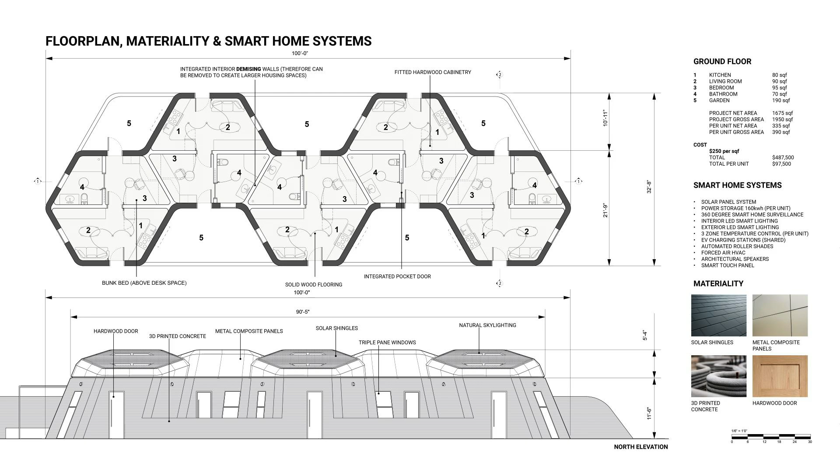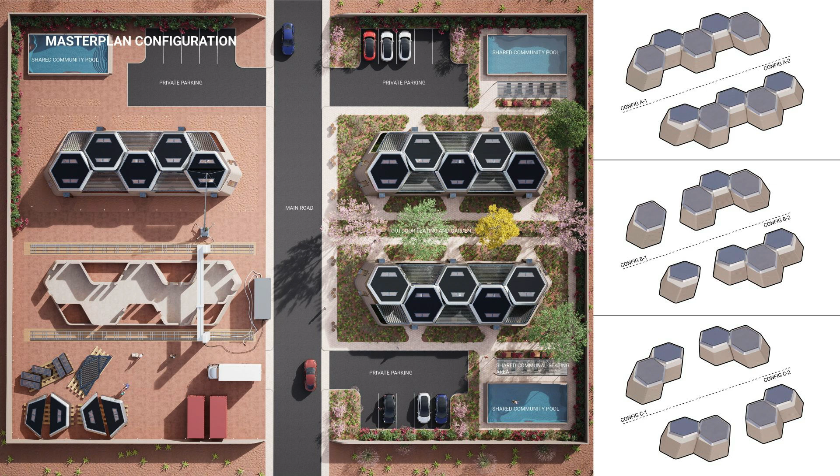And so what we did was we tried to look at how many configurations can you come up with. If we're building a community, you're limited by the printable volume, but you can take this idea of the hexagon and start playing with it in multiple configurations. And you see that diagram on the right. You can have certain clusters that are either studios, and then you have a 2-bedroom, or you have two bedrooms, or you have just one large continuous print, which could be broken up in different ways.

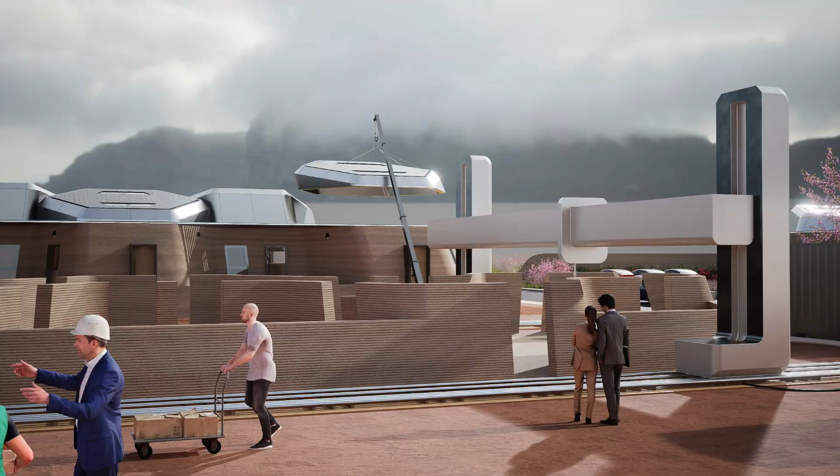It's really hard to fit. Actually, for this competition, it was really hard to fit the inside. It was actually a real challenge, trying to get as much as possible.

So I don't know if I told this to you guys, but I'm also a professor at ASU, and I've been teaching architecture there now for a year and a half. And more recently, I've been appointed professor of practice of space architecture. And so one of the things that I wanted to pursue as I was teaching a studio was this idea of building a new center for ASU where you could explore science and space.

And so I actually had my students do a similar project. We picked a site very close to the campus, and I wanted to try and solve that problem myself. But it was the idea of building a facility where you can experiment with large-scale space exploration technologies, construction, habitation, a lot of things that are really interesting in that part of the world.

Because right now, I don't know if you guys know this, but ASU just launched a new program in space architecture, and I am a professor of that program now. It's going to be starting next year, and I can tell you more about that. I'll actually share a link if you guys want to pursue it or look into it. But it's the second in the country, and I believe it's going to be the third in the world. And it has the potential to become a really amazing program.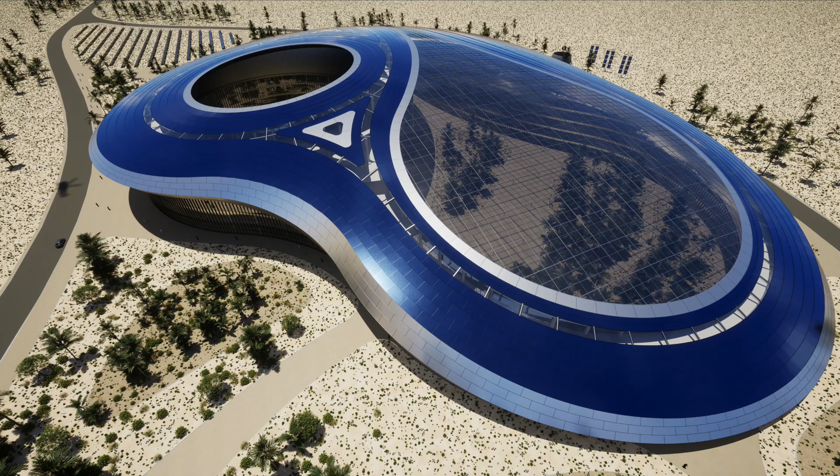So this project, it's a really big building, and we were exploring this idea of creating a large ecosystem within the building envelope. And because it's mostly labs and a lot of office spaces and working spaces and some even high bays, it really wants to be like a bar building. So the idea was, it started with the bar building. We started kind of creating these iterations of how the bar could maybe wrap around itself.

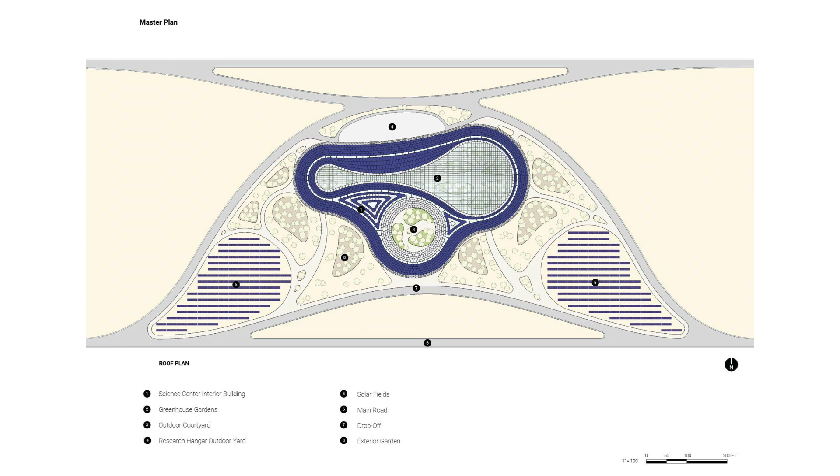And what you see here is like a roof looking down where you have two courtyards. You have one open air courtyard and you have one large greenhouse. And here's the site plan. And so the idea was, can we put this on a site not too far from ASU and make it like a destination? It's not just a building, it's a park space. It's both exterior, interior park space, and it has an abundance of energy collection to power all of the needs of the building.

And here you see the program broken up. It's about 1.4 million square feet. The bottom of the building is mostly the robotic construction and exploration facilities. And then that spills out to the surrounding areas, as well as the astronaut analog and training facilities. And so the astronaut analog training facilities, we would have everything from hangars to conference rooms to offices, even having some outdoor exploration areas where the students could perform some work.

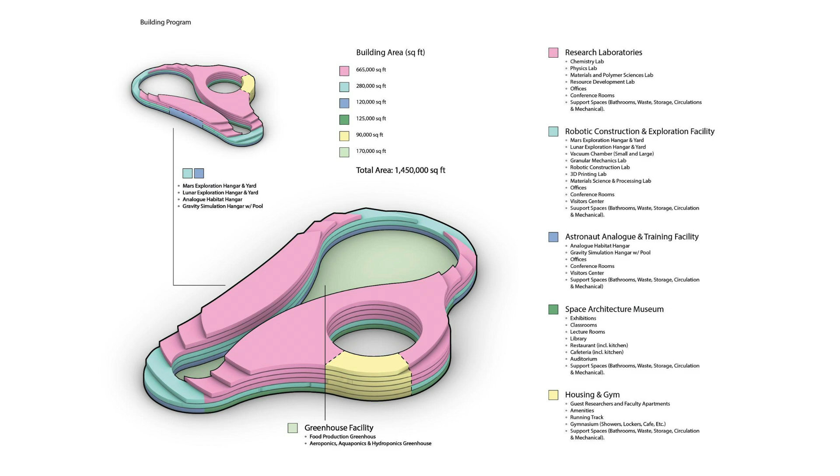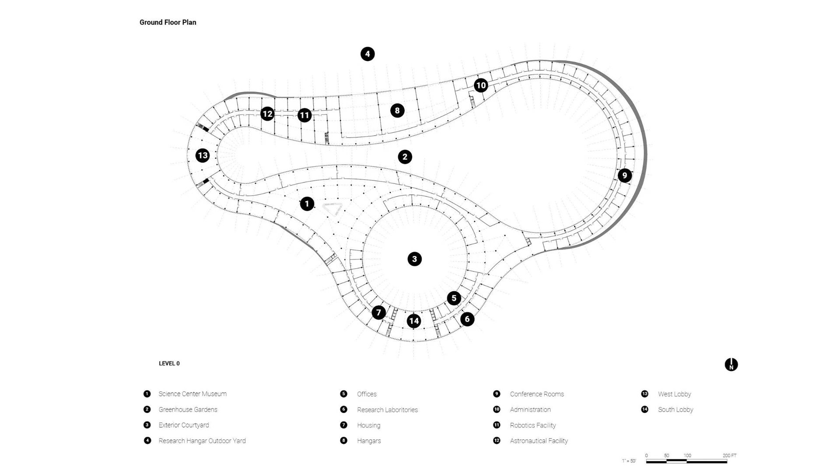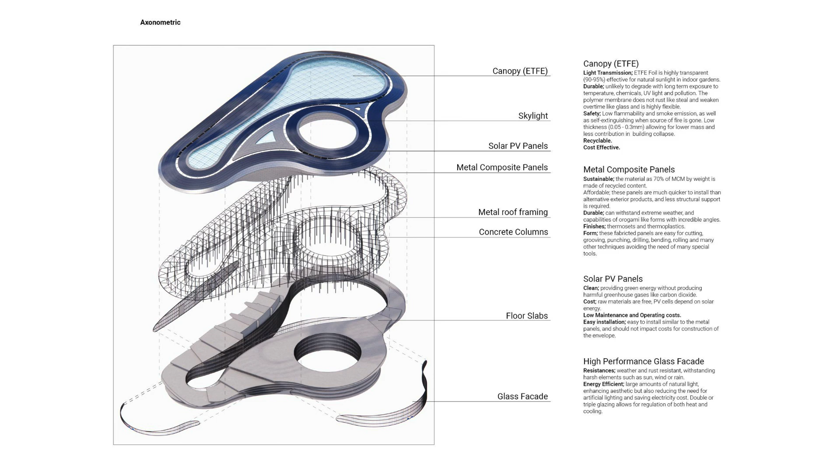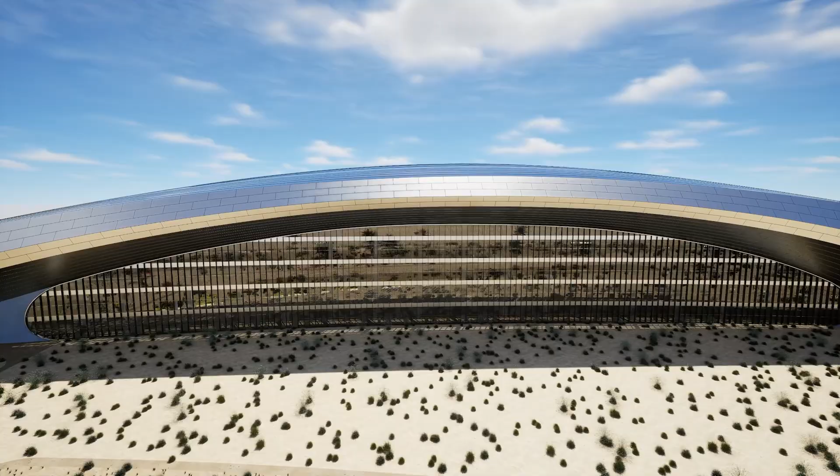I didn't get to describe the process of designing the building itself, but it started with a lot of computational design, parametric design, looking at the form factor, orientation, and of course, part of that also was analyzing the floor plan, because you want to have certain lab spaces be a certain depth, and lab spaces have both wet rooms and dry rooms where you perform certain kinds of work.

And then where you have the high bays, you need really large spaces like 60-foot tall ceilings to be able to bring large pieces of equipment in. And so the building form kind of reacts to that program as it wraps around. And you can see here, this is where you get closer to the high bay areas.